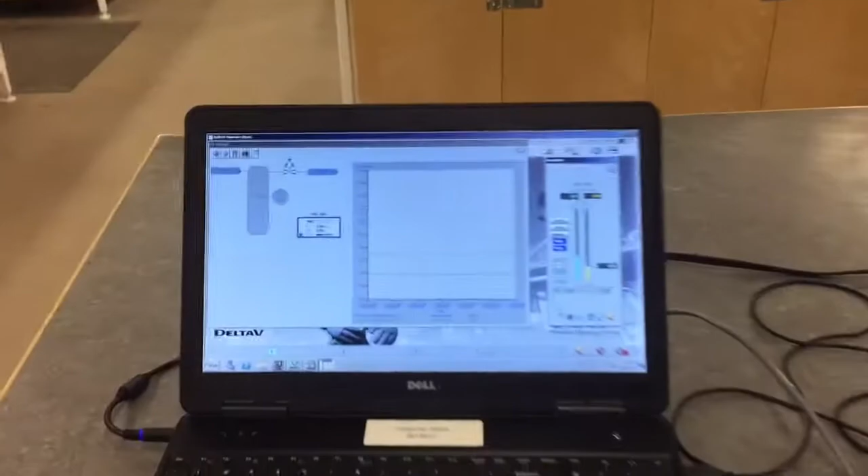In this video, we're going to do a demonstration of using DeltaV to control pressure in a vessel. So right over here, I'll just quickly take you over to our DeltaV Professional Plus workstation. We have DeltaV Operate running currently. This here shows our process.

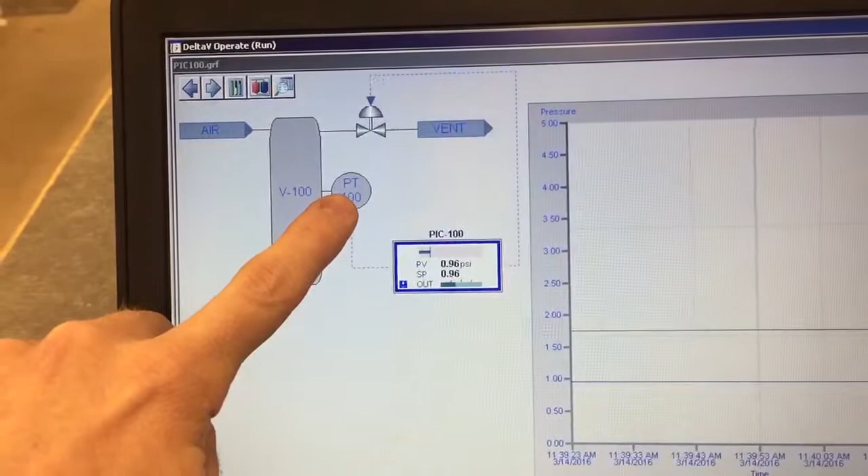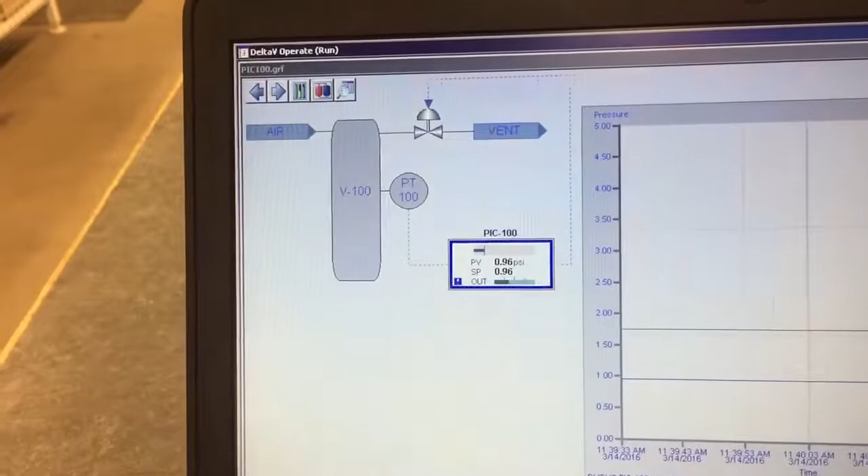We have air coming into a vessel, a pressure transmitter measuring the pressure within the vessel, the controller here, this is within DeltaV, calculating controller output and sending it to a valve that is venting the air off, trying to control pressure. Currently the control loop is in manual.

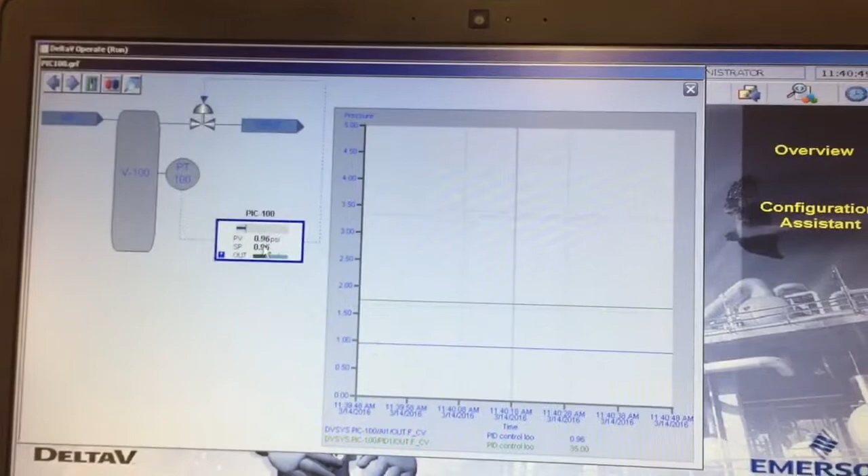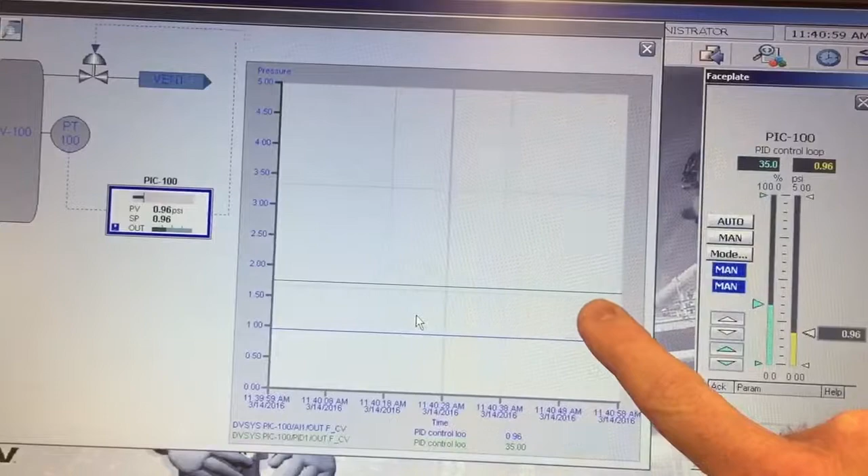You can see here I have the controller faceplate open. Just click, closes it. To open that controller faceplate, we click on the controller here in DeltaV Operate. Still in manual, and here we have a trend. This trend is showing the percent open of the valve, and the blue here is our pressure in the vessel.

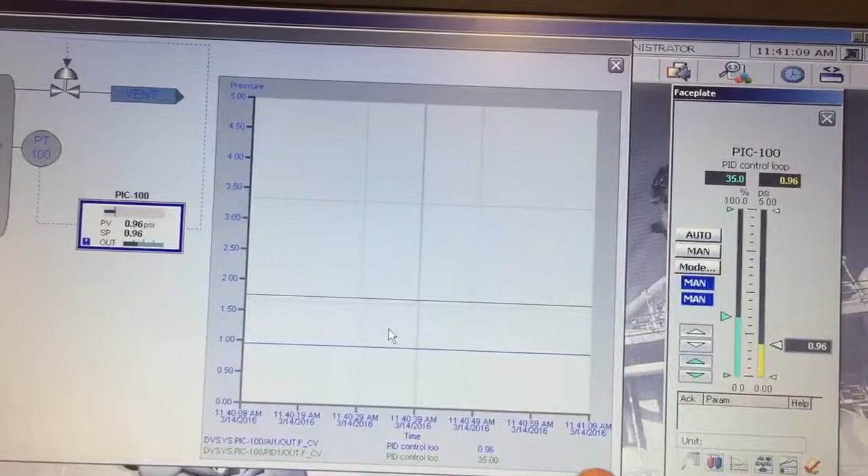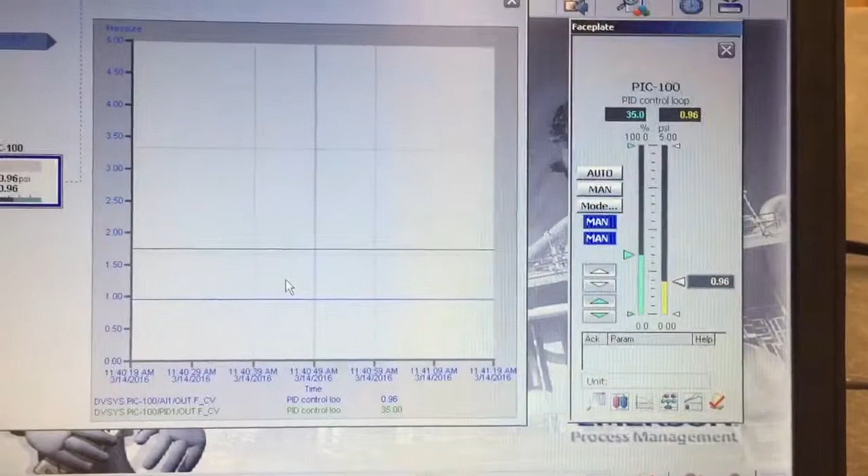You can see on the y-axis here we have 0 to 5 psi, and then on the x-axis down here we have 1 minute of time, and each one of these increments is 10 seconds. 1, 2, 3, 4, 5, 6 for 60 seconds. Okay, so just to demonstrate our process here, we're going to bump our valve open 10%. So I'll click here, change this to 45%, and we'll watch our process respond.

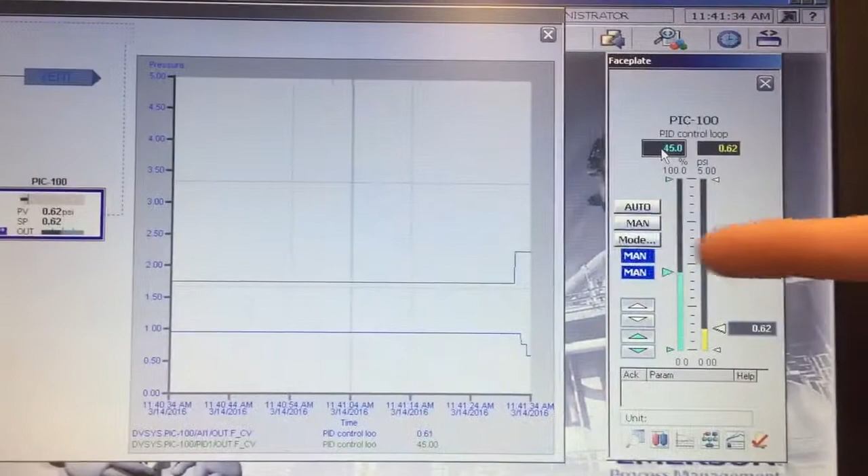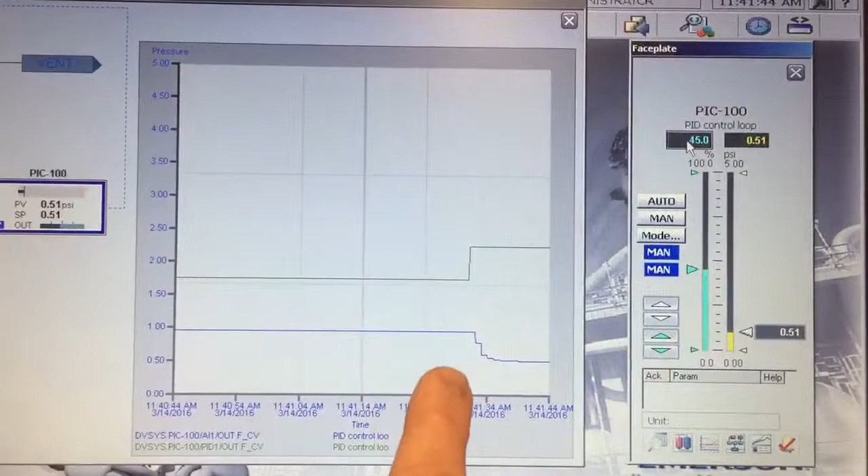You can see here our valve opened 10% and the pressure in the vessel started to drop off. So this here shows a self-regulating process, and it has a fairly quick time constant, probably about a second or two time constant. So about 2 seconds for it to get to 63% of its total change.

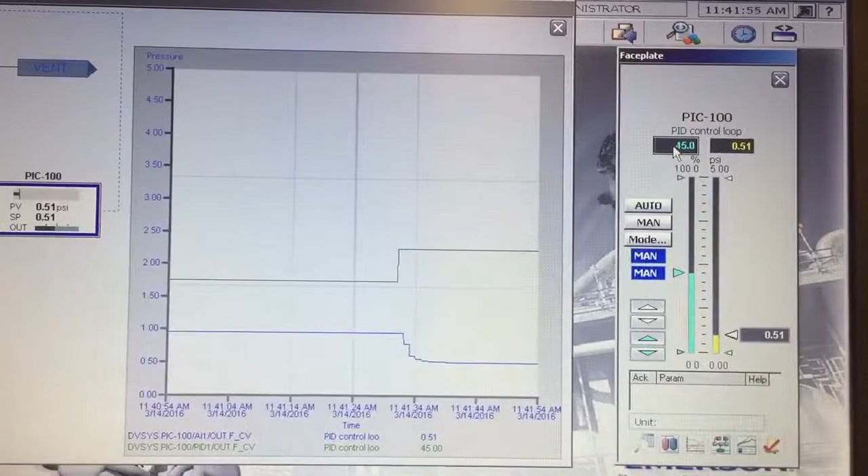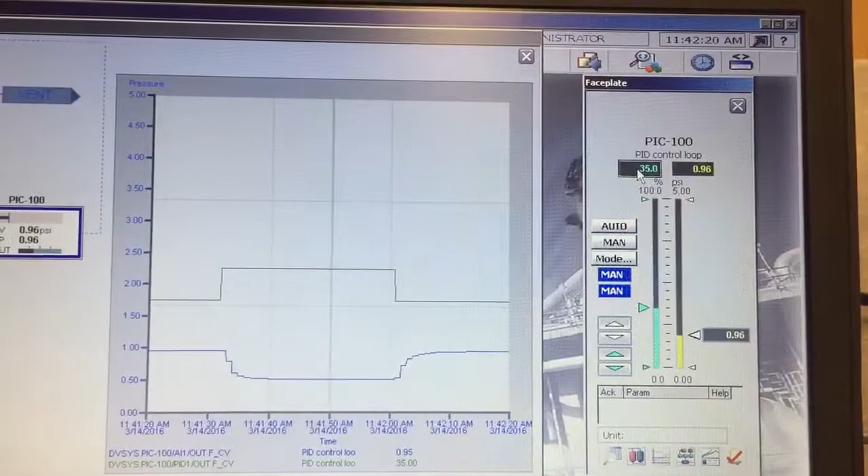Okay, so let's change this back to 35, the output of our controller. So our valve goes back to 35% open, and you can see our pressure builds back up to about 1 psi. So we're going to be assuming that our control loop normally operates around 1 psi. So when we do perform our tune on this, we're going to be performing a Ziegler-Nichols closed loop tune. We are going to be tuning it around 1 psi.

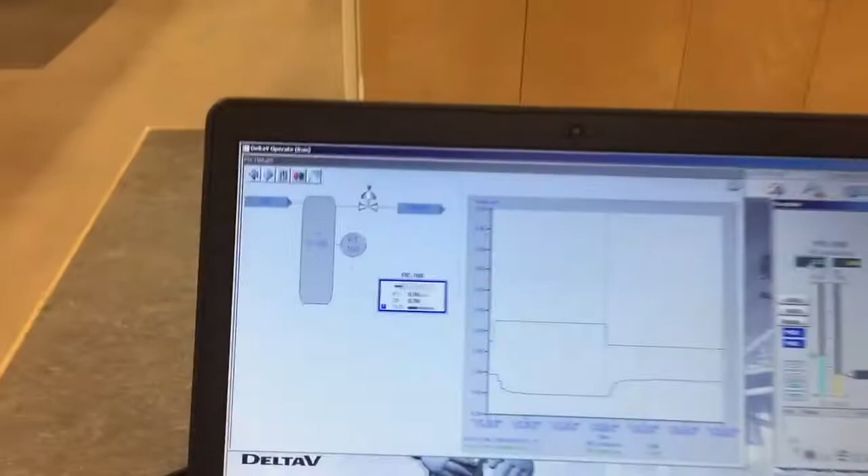So let's go have a look at the process over here and find this pressure transmitter PT100, our valve, and our vessel. So I'll walk you guys over. You can see right here is our vessel. This blue line right here is our sensing line. It runs down to our pressure transmitter. We're using a differential pressure transmitter. It has a maximum range of about 6 or 7 psi, so the 0 to 5 psi range works great

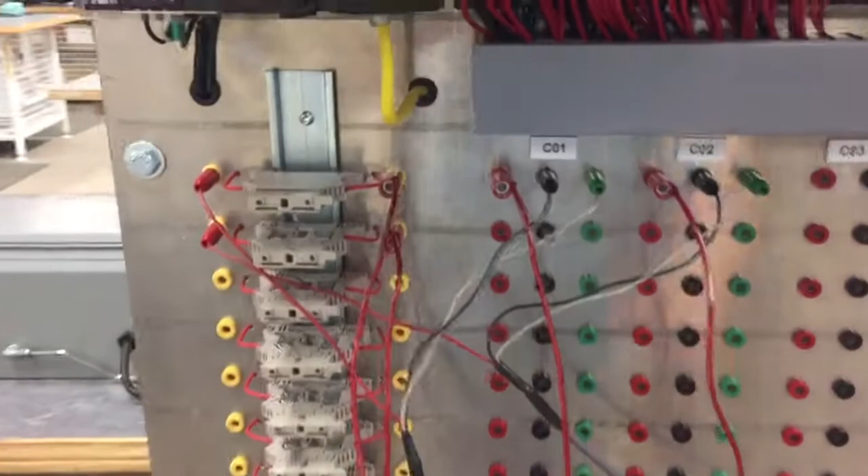for this transmitter. We use the HART field valve parameter within DeltaV to write our range values to the transmitter, the 0 to 5 psi range values, and it is connected back to the DeltaV control system through these twisted pair wires. You can kind of see there's wiring running everywhere here, but right here, this is our cable going to our analog input on card 1, channel 1, and we have a fuse hooked in series here with our analog input from our transmitter.

So this is power sourced out. It goes through the fuse and then runs out to our transmitter and comes back in on this black wire here. This green banana jack plug is for shield, to help drain any interference that could come into play on our analog input loop.

Okay, for our valve, this is our valve that's venting the air out of our vessel. You can see we have this 1/2-inch flex hose that's ran back to our vessel and connected right here, down here, and at the top of our vessel, this is where our air supply is coming in. So we have air off of our bench regulated to 5 psi coming into our vessel.

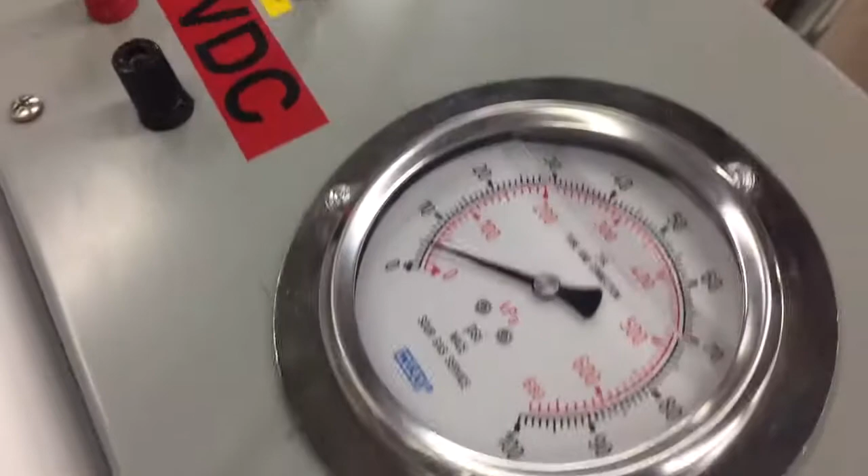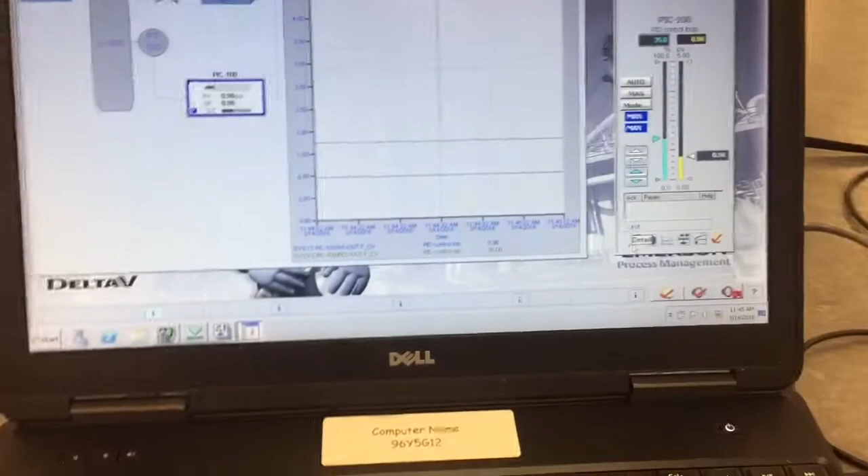Alright, so right now we have our valve open about 35%, just like we'd set up here in our DeltaV control system, 35% output. Okay, so what we're going to do first is we're going to place our control loop into automatic. I've already biased the controller at 35%. So just to show you how you bias it, biasing is the value that the controller is going to output when we have 0 error.

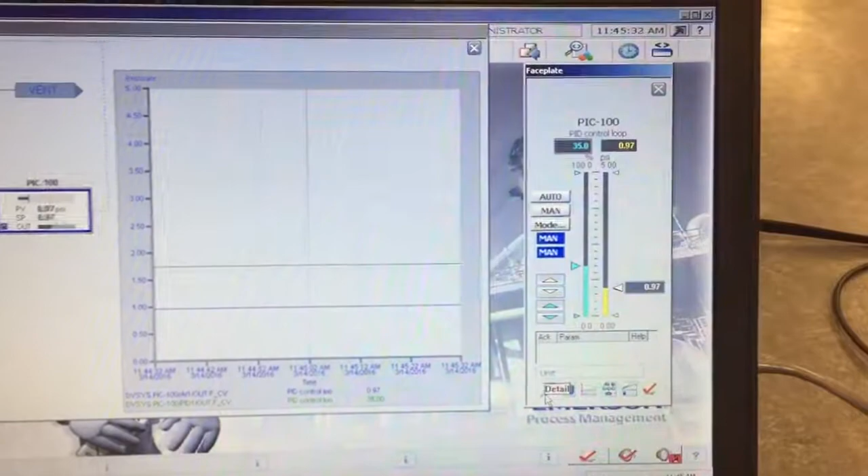That means there's no error between our process variable right here and our set point right here. So our process variable and our set point both are the same value. In this case we want them to be about 1 psi. The biasing is the percentage that's going to be sent to our valve. So in this case, 35%. Because we know that when we have the valve open 35%, we have 1 psi pressure in the vessel. So this should be already at 35%.

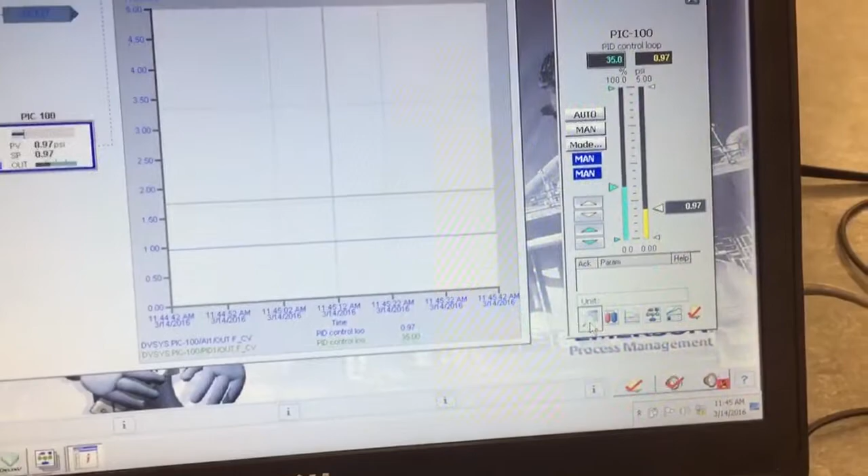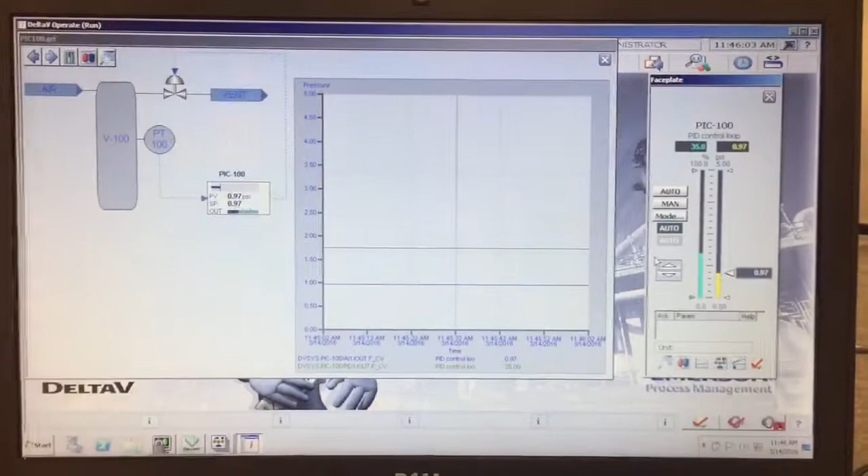Let's verify. So we'll go into our controller settings here and go down. Yes, our biasing is set at 35%. Right now our gain is a value of 1. So what I'm going to go and do is put this control loop into automatic. Because with the closed loop tune, we want to have the control loop in automatic. We bump it, then adjust the proportional gain, and try to get our control loop into sustained oscillation.

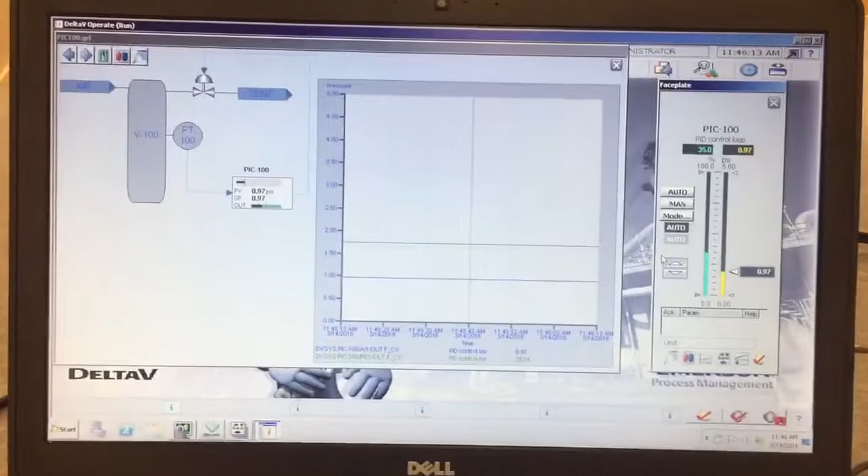So right now, we're in automatic. I'm going to bump our loop by changing the set point. I'm going to bump it up to 2 psi.

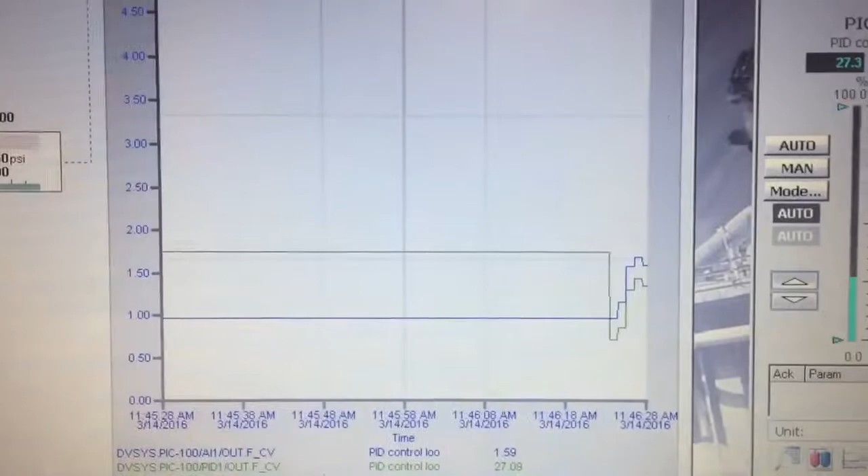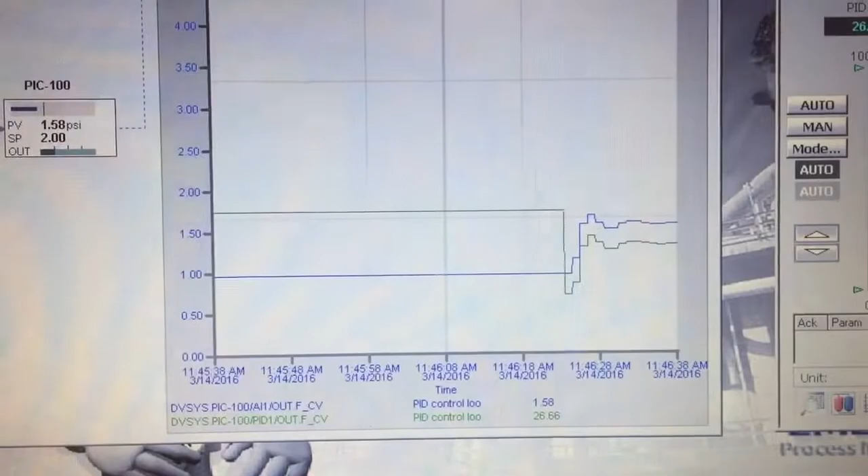So we'll see if our control loop goes into oscillation. This trend is going to help us determine that. You can already tell that the oscillations got smaller and smaller and the control loop did not go into sustained oscillation. So that means we need to change our proportional gain.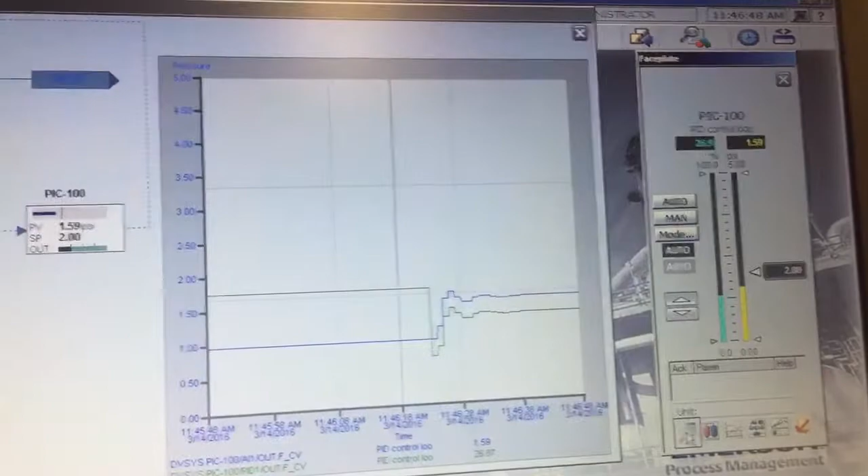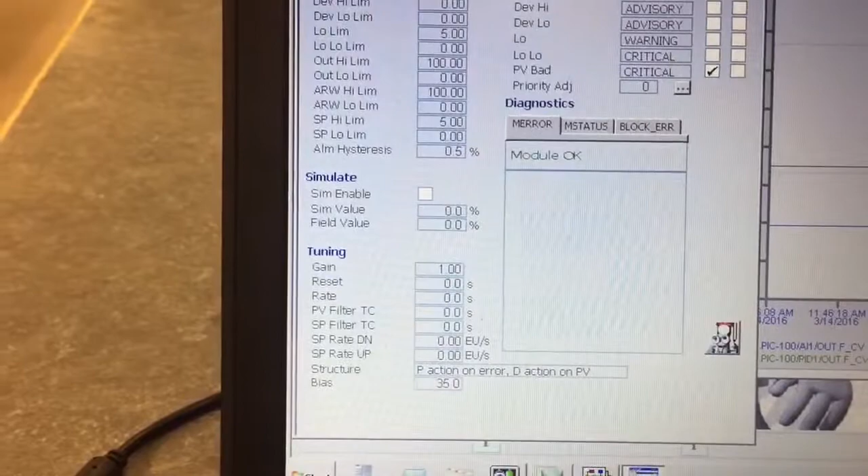Keep in mind, our controller has to be set up for proportional only. This down here tells us that we're using a P action, proportional action on error, and D action on PV. You cannot select proportional only in DeltaV. You can only select this setting here to get rid of integral. The D action is not going to be used. We have it turned off; we have the rate setting set to 0. And setting the reset setting to 0, I've had trouble with. It still seems to use reset for some reason when we have our structure set up using the integral setting.

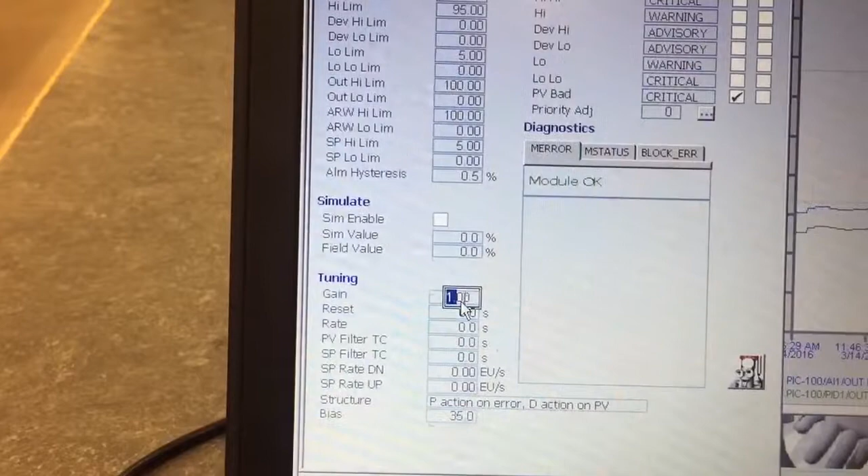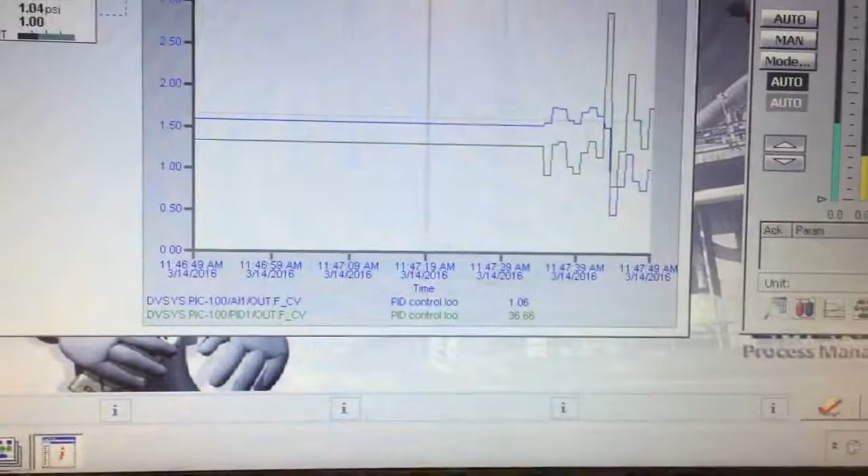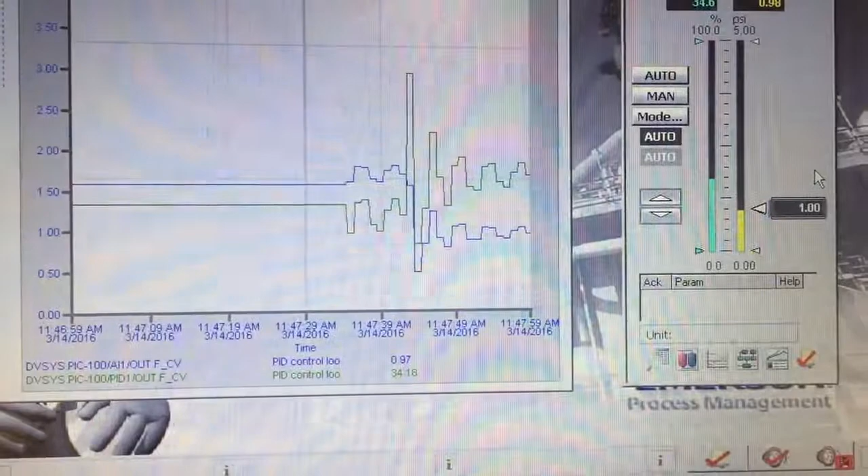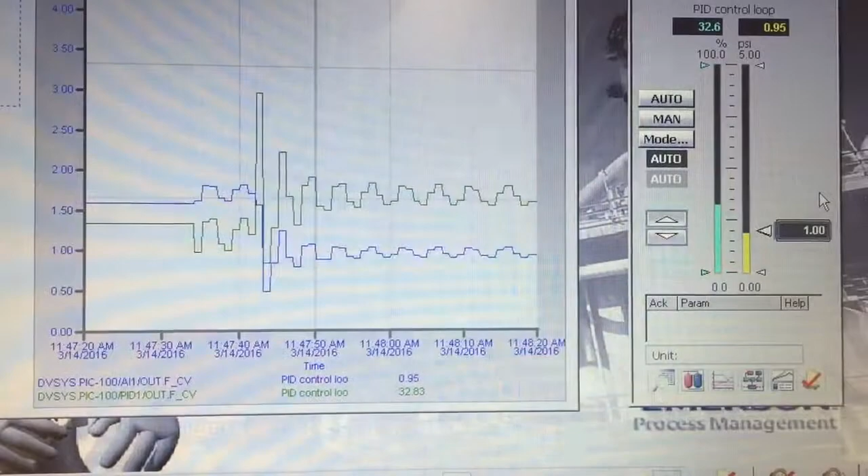So let's bump our gain. Let's try a value of 2. Okay, I'm going to bump our set point back down to 1 psi. You can see our control loop is oscillating more this time. So it appears that we are in sustained oscillation. That means that our ultimate gain for this control loop is going to be a value of 2.

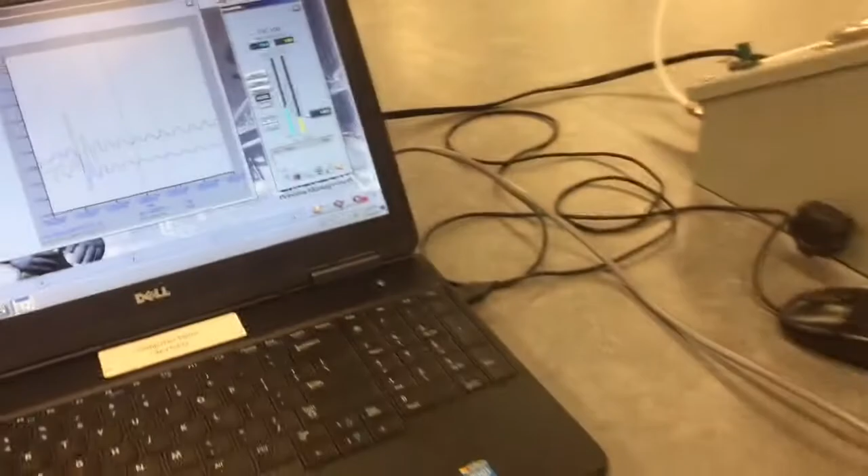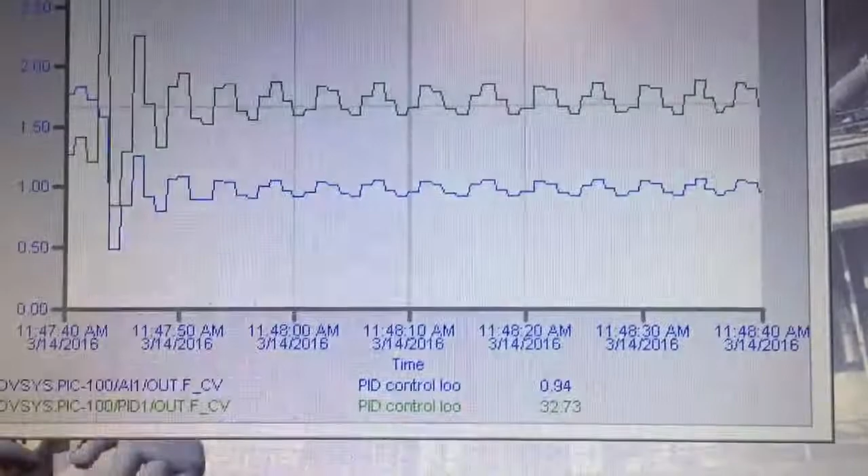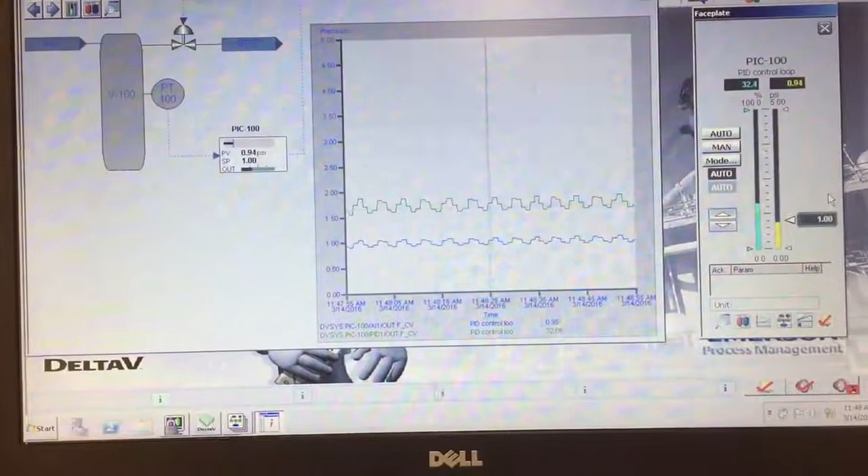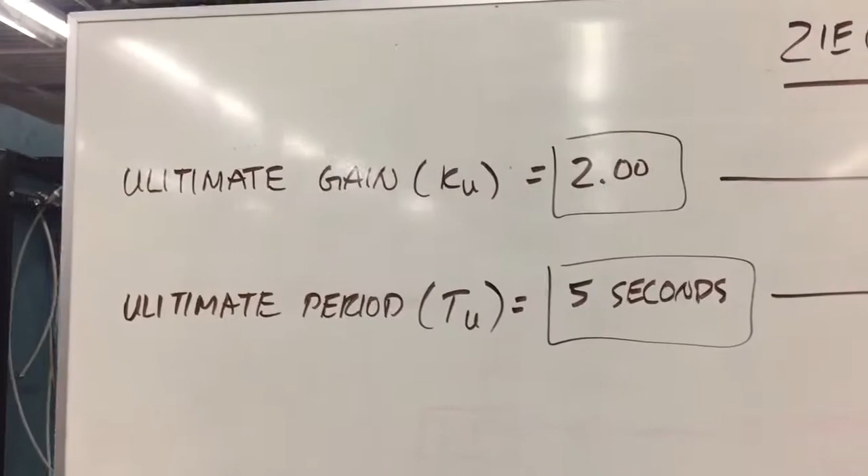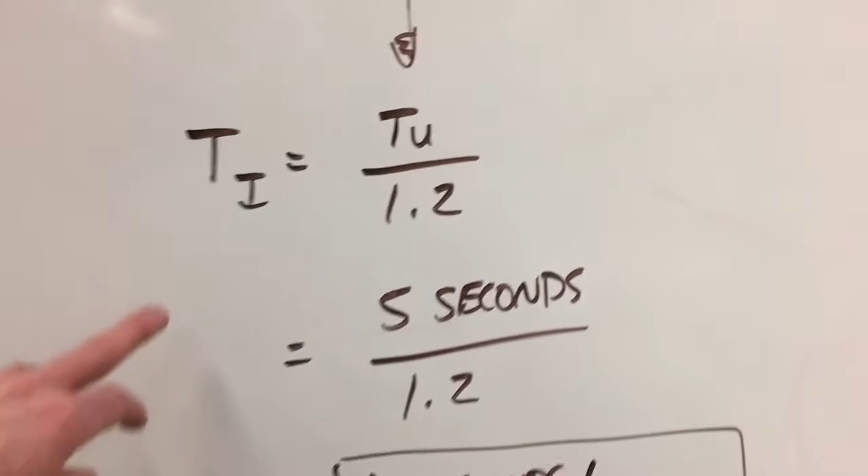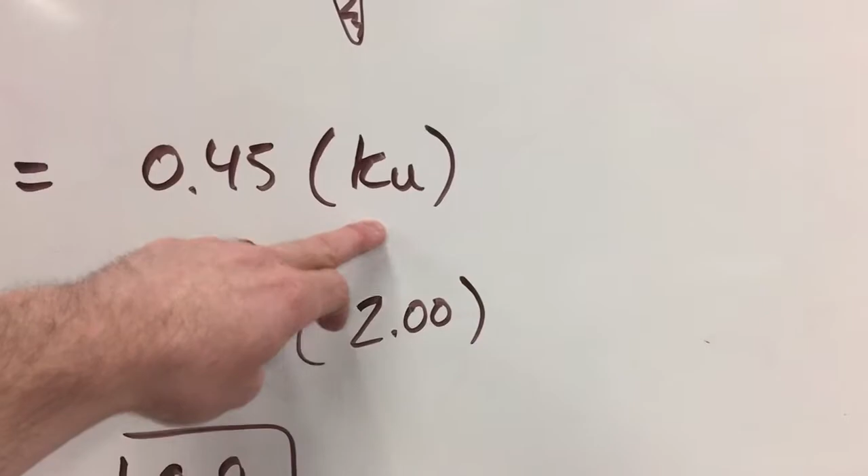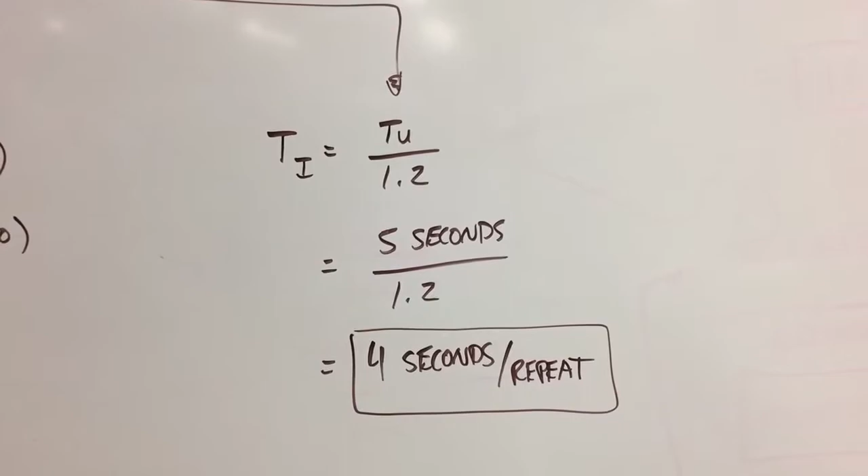period of 5 seconds. So using the Ziegler-Nichols formulas to calculate our proportional gain value and our reset time, we enter our ultimate gain, multiply it by 0.45. So 2 times 0.45 gives us a value of 0.9. And for our reset value, we take our period of oscillation and divide it by 1.2. So 5 seconds divided by 1.2 gives us a value of 4 seconds per repeat.

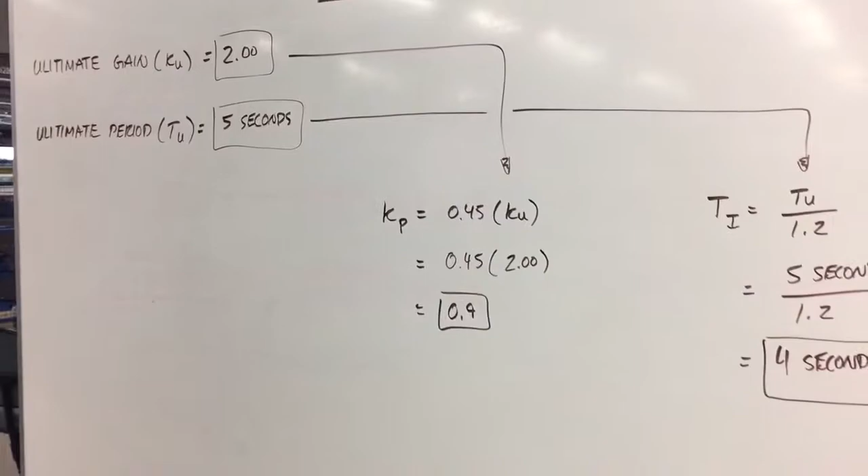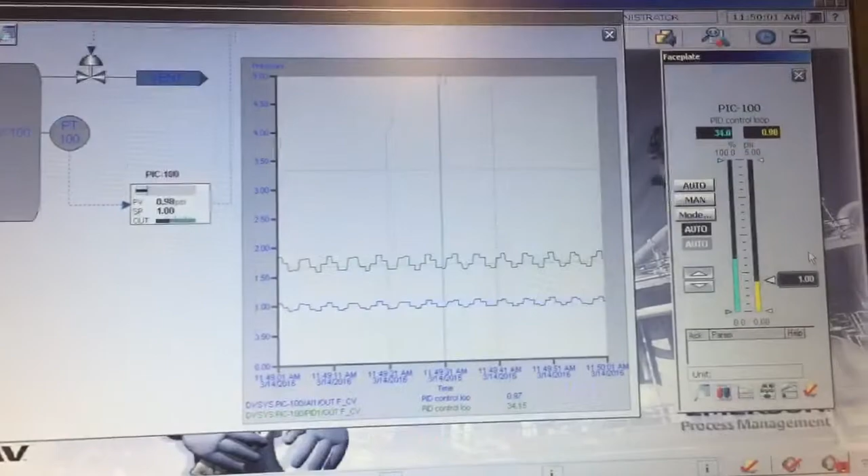These two values, we can go ahead and enter into our DeltaV controller, and we will need to change our controller to have a reset setting, and then we can see how our controller responds. It should be close to quarter amplitude decay. That's the goal of the Ziegler-Nichols tune. To do that, we click down here again on our detail button for our controller, and you can see our tuning parameters down here. Our gain we're going to change to 0.9, and our reset we're going to change to a value of 4.

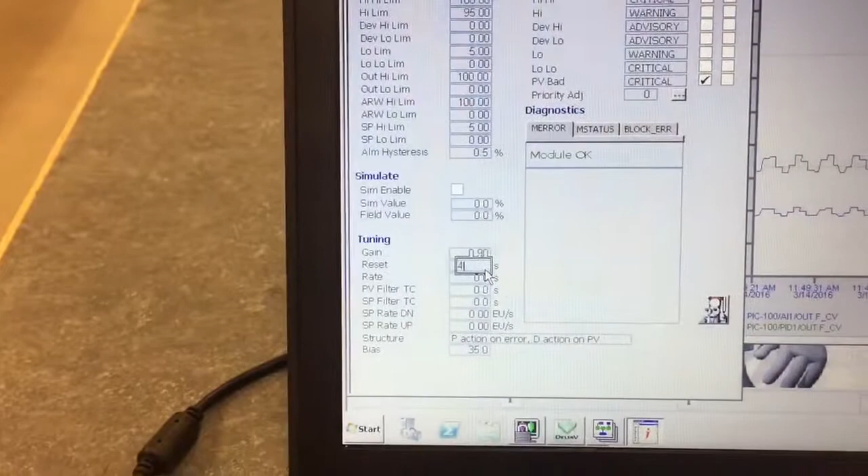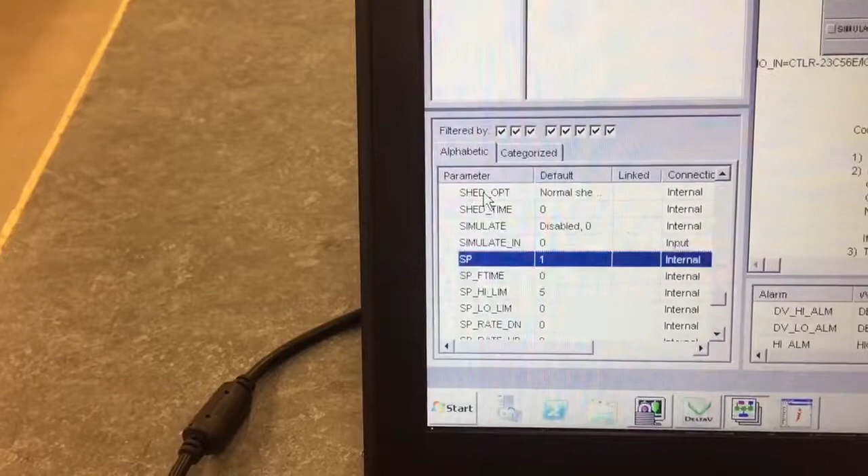And to change our structure down here, we actually have to go into Control Studio. So open Control Studio, double click on our PID block, and our parameters should now appear, and we're going to be looking for that structure parameter. So press S. There it is right there. I'll double click on the parameter, and we want to change it to a PI action on error and D action on PV.

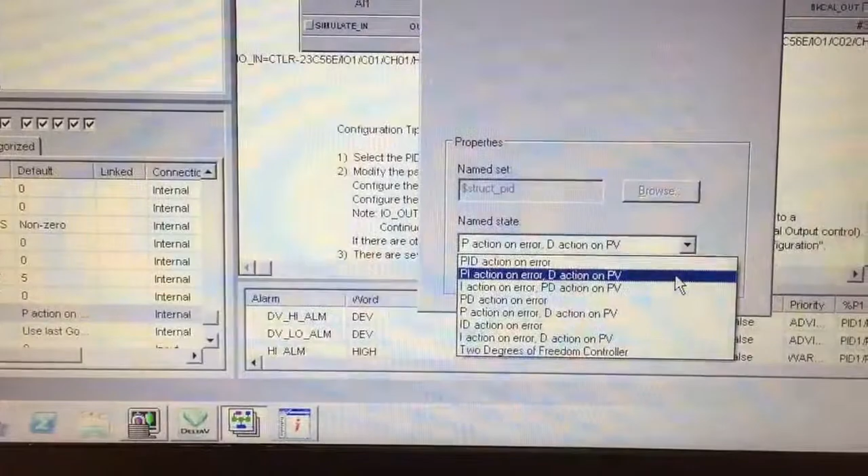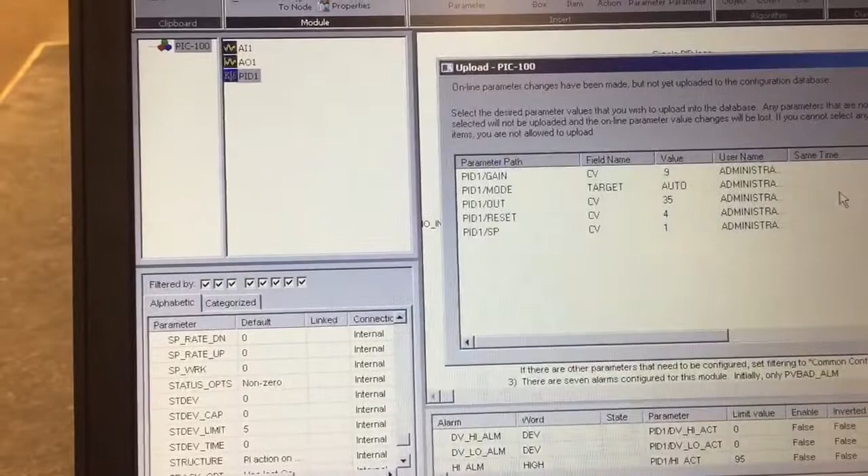What this will do now, the proportional and integral settings will be used in this controller. Before we were just using P action on error, so there was no integral being used. That's how we were getting our controller into a proportional only controller that's required for the Ziegler-Nichols tune. So select this, click OK, and we'll do a quick download on our control loop. It's asking for an upload and a download, so we'll grab all the settings that we had written to DeltaV and DeltaV Operate, upload those settings, close, yes we want to save, and let's do our download.

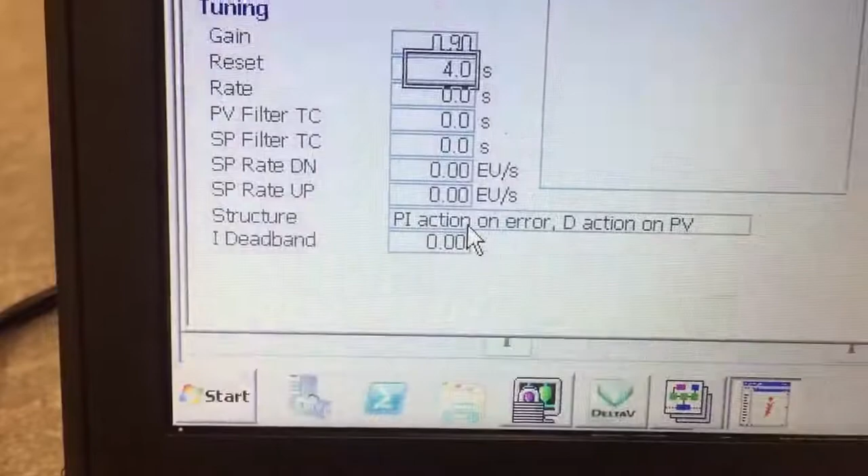So we've downloaded these changes. We can go back into DeltaV Operate, and now you can see down here our structure has been changed to PI action on error and D action on PV. And we've got our values from our Ziegler-Nichols tune already entered, 0.9 and 4. So we'll close this detail window, and now let's try bumping our control loop. Let's go up to 2 psi, click OK, and let's watch our response.

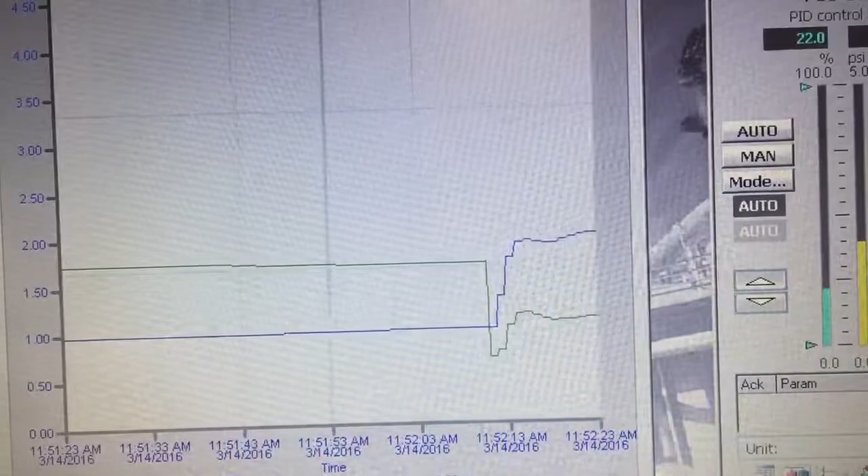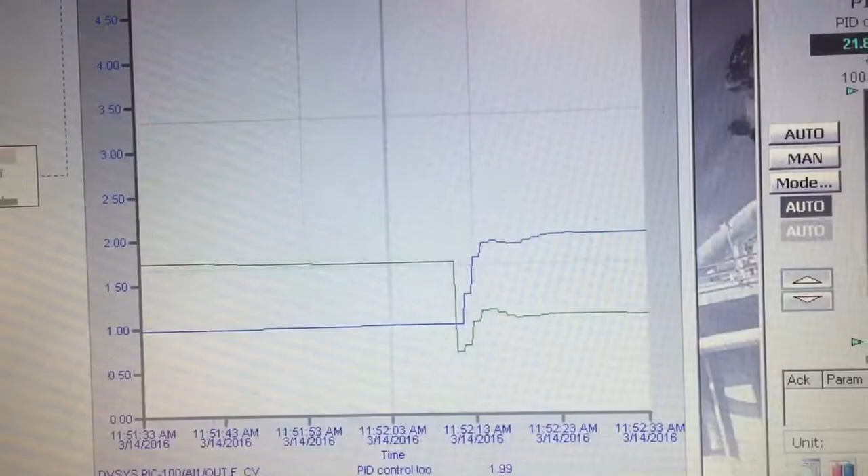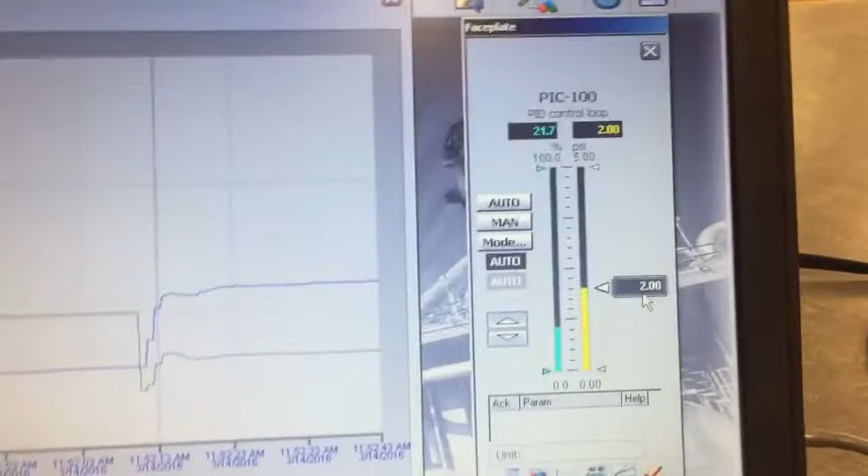So you can see it has a slight overshoot, not quite quarter amplitude decay. We might need to increase our gain a little bit if we wanted to have a quarter amplitude decay, but it tuned the loop quite well. We'll just drop back down to 1 psi where we would normally control. You can see we have no offset because we're using the integral setting, so our process variable right here, 2, matches our set point of 2.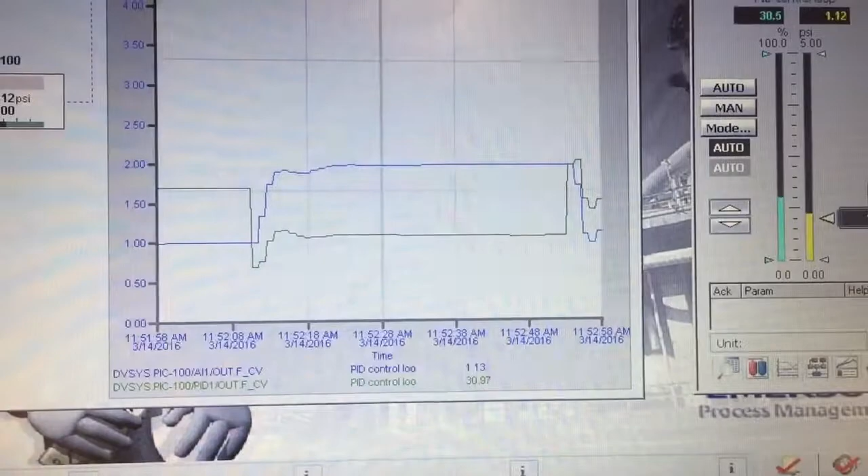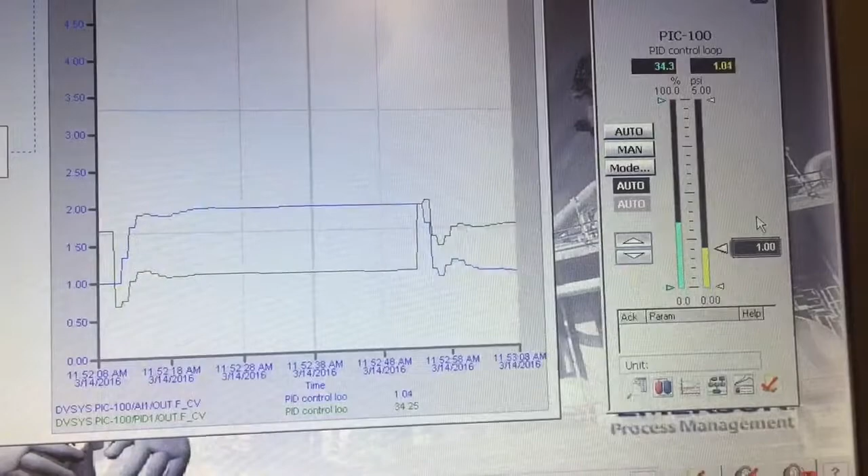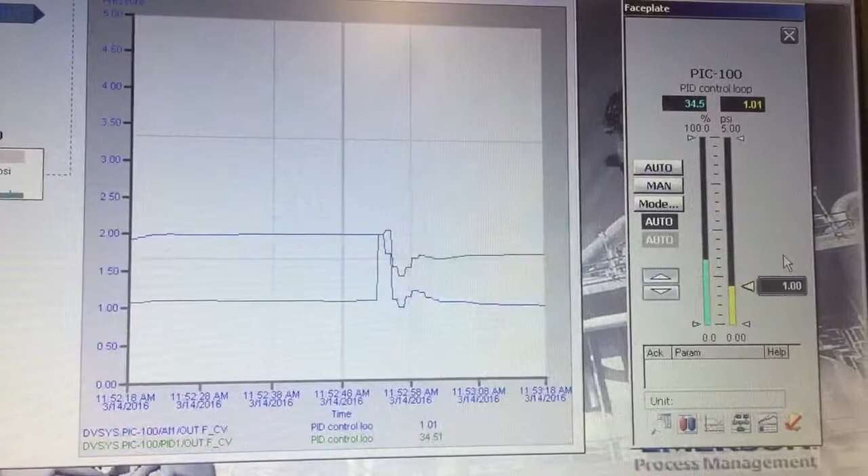Let's double click and change our set point back to 1, and watch how our control loop responds. So pretty close to quarter amplitude decay, not quite, but you can see here we're getting really close to 1 psi again. So there, a completed Ziegler-Nichols closed loop tune using DeltaV on a pressure control loop.